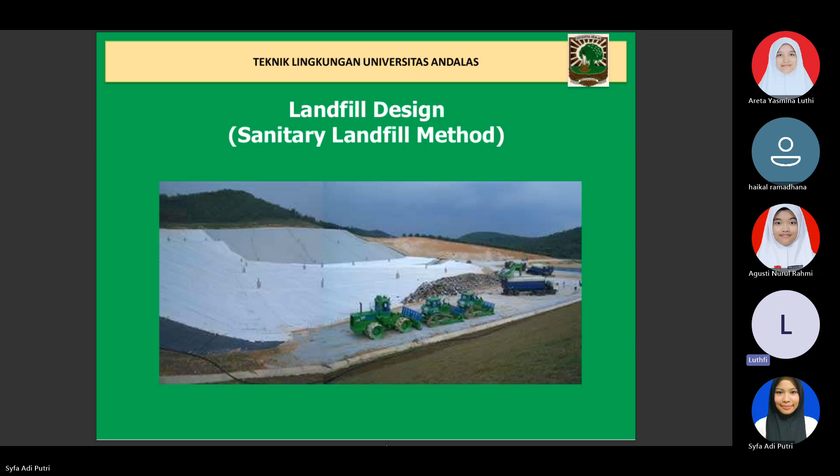Next, about landfill site requirements, in accordance with Indonesian National Standard 03-3241-1994 on procedures for selecting landfill sites. Landfills are equipped with infrastructure and facilities consisting of drainage infrastructure, roads, reception facility, waterproof layer, gas containment facility, leachate containment facility, cover material, heavy equipment, greening, and supporting facilities.

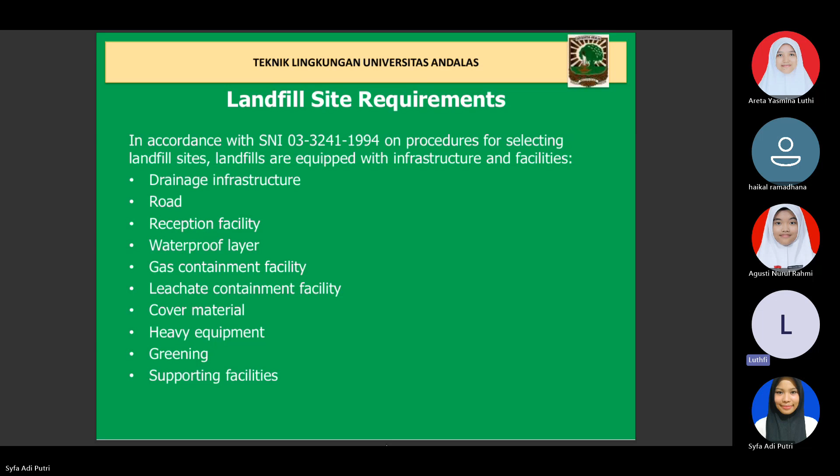The next slide shows pictures of the sanitary landfill.

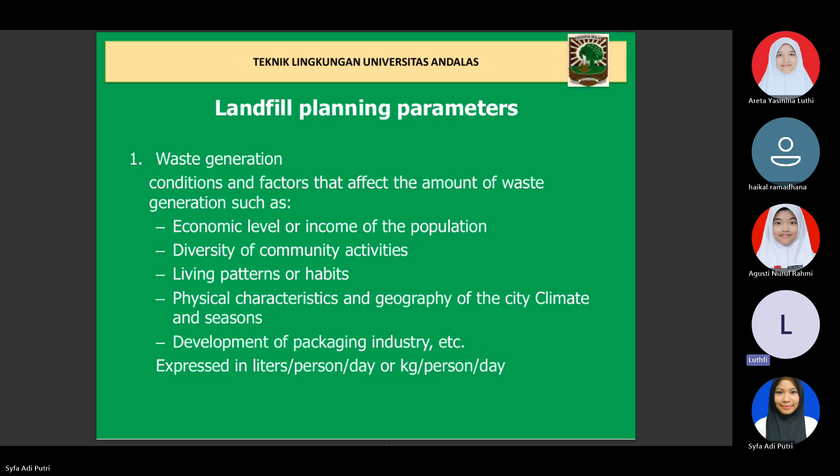The landfill planning parameters: the first is waste generation. The conditions and factors that affect the amount of waste generation include the economic level or income of the population, the diversity of community activities, living patterns or habits, physical characteristics and geography of the city, climate and seasons, and the development of the packaging industry, among others. Waste generation is expressed in liters per person per day or kilogram per person per day.

The second parameter is land area requirement. The amount of land required will depend on the amount of waste to be disposed of. The larger the waste generated by a city, the wider the landfill needed to accommodate it. In general, the determination of landfill needs is based on the waste generation reduced by certain factors.

Initial density: the collected waste is transported to the landfill. At the landfill, the compaction process occurs, and comparing the density of waste in the landfill with the initial condition, the amount of landfill land needed is then estimated.

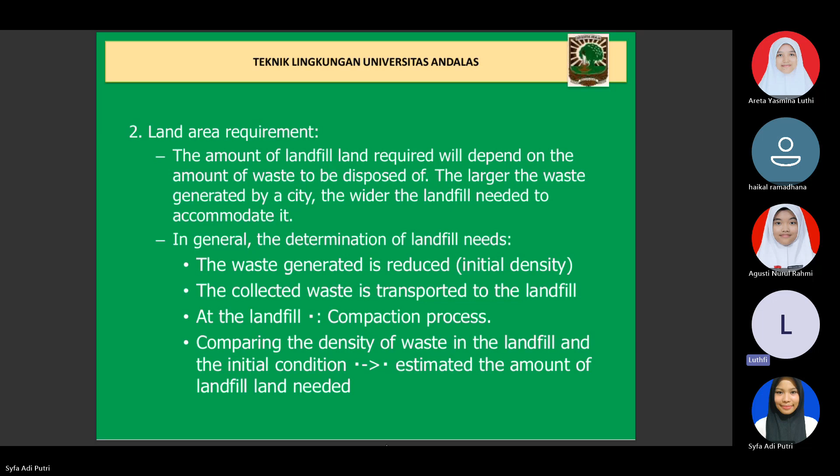Next is land area requirement and landfill capacity. The site used for the landfill should be able to accommodate waste disposal for a minimum of 5 years of operation. The initial calculation of landfill land requirement per year is as follows.

This formula: the volume of waste to be disposed of, times the waste compaction level, times 365, divided by the height of the embankment plan in meters. Then the land area requirement can be found with this formula: land area per year times the land age in years, times the ratio of total land area to effective land area, which is usually 1.2.

Next is an example. We have to determine the landfill land requirement area for 5 years, given that the incoming waste every day is 800 cubic meters, with a planned pile height of 10 meters and a compaction factor of 0.33. How to solve it is shown in the next slides.

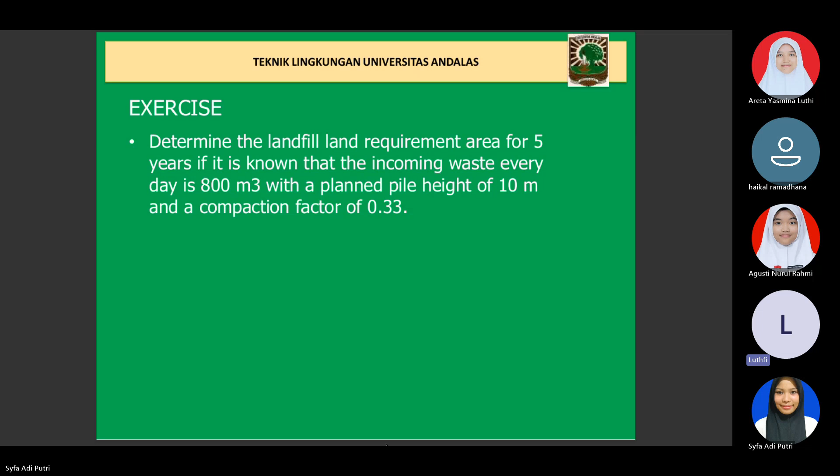Next is landfill site planning. Things to note: first, spatial suitability, to avoid overlapping land uses. Second is the utilization plan — the utilization plan of the former landfill needs to be determined from the beginning. Some alternative utilizations of the former landfill include greening, plantation land, parks or recreation areas, sport sites, and so on.

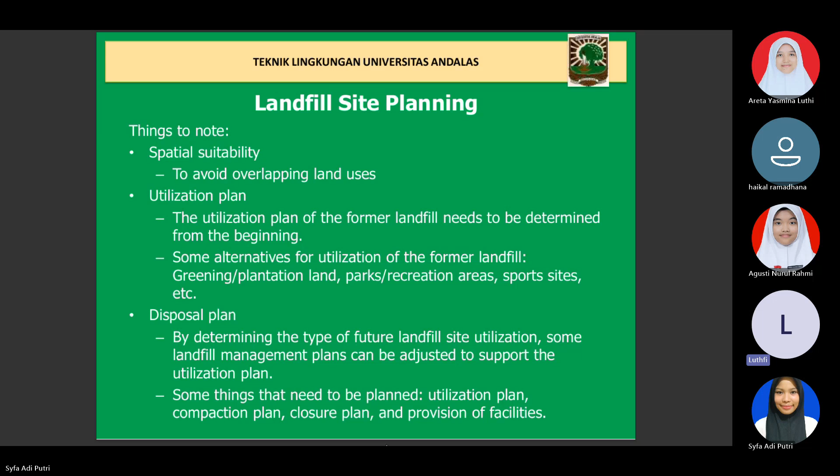Next, the disposal method should meet these principles. First, in large cities and metropolises, the sanitary landfill method is planned, while medium and small cities must at least plan for the controlled landfill method.

There must be control of leachate, which is formed from the decomposition process of waste, so as not to pollute the soil, groundwater, and existing water bodies. There must also be control of gases and odors from waste decomposition, so as not to pollute the air, cause fire or smoke hazards, or cause greenhouse effects. There must be control of disease vectors.

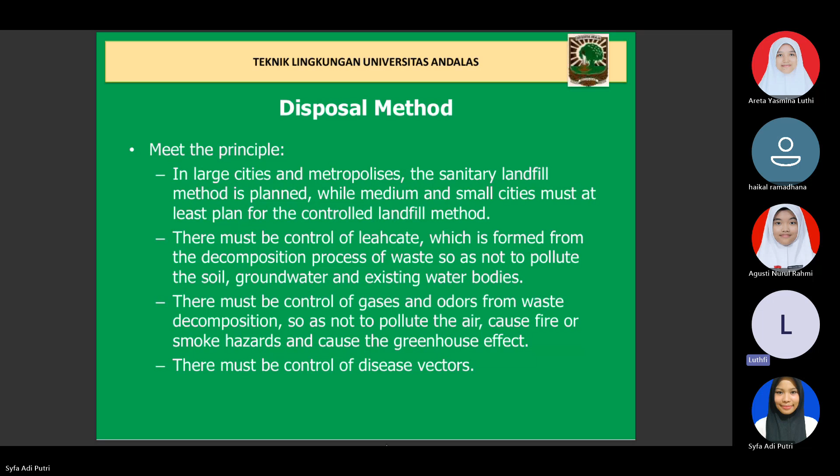Next, the landfill infrastructure and facilities planning. Public facilities consist of access roads, operation roads, support buildings, drainage, fences, and signage. Environmental protection facilities consist of landfill base formation, leachate collection channels, gas vents, ground cover, buffer zone, and test wells.

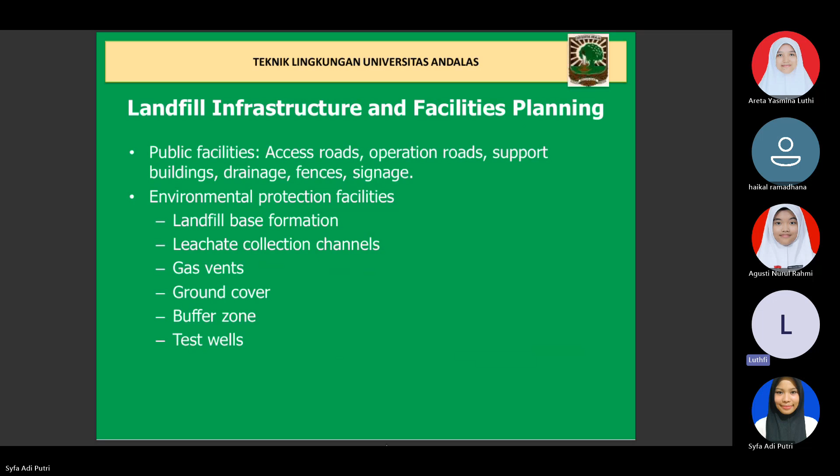For the next part, supporting facilities consist of weight bridge, clean water, hangar, firefighting facilities, and recycling and composting facilities. For operational facilities, the heavy equipment required includes bulldozers, wheel or truck loaders, excavators, or backhoes.

And for the next is the layout plan. In determining the layout plan for the sanitary landfill, we must consider the land use should be optimized so that no land is left unused, and the landfill site should be protected from public roads that pass through it.

This can be done by placing a living fence around the landfill, which can also function as a buffer zone. The leachate treatment ponds should be located so that leachate flows by gravity as much as possible. The placement of operational roads must be adjusted to the landfill cells or blocks so that all waste piles can be easily accessed by trucks and large equipment.

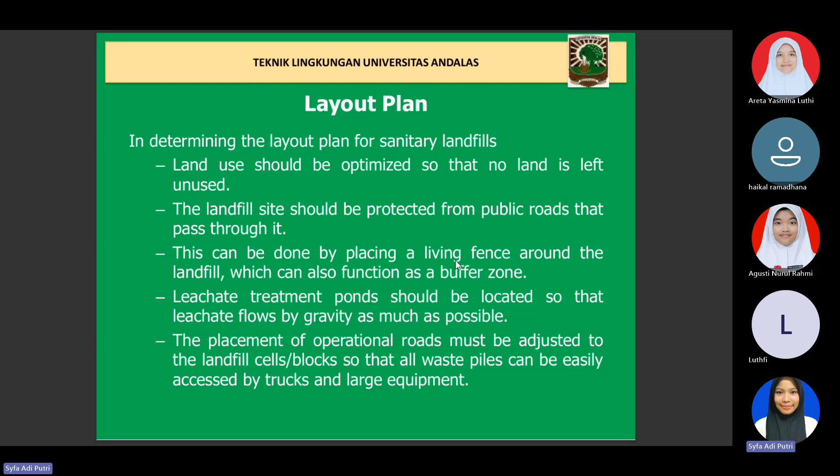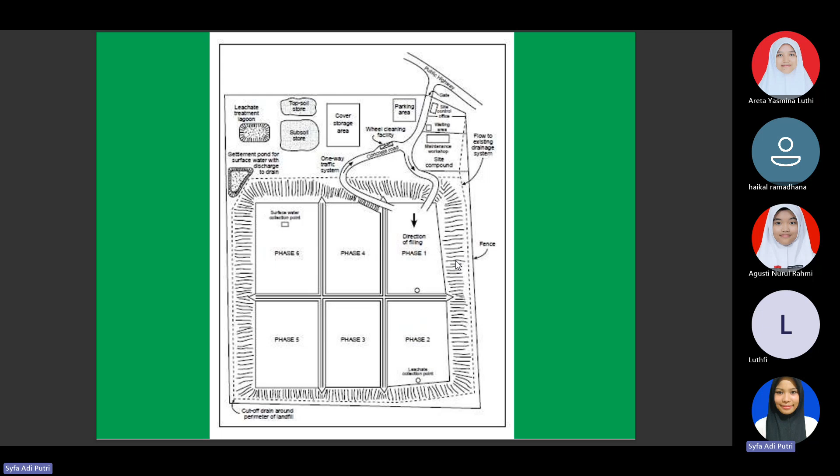This is an example of the layout plan for the sanitary landfill, and this is also the layout design for a landfill. And what is the stage of landfill design?

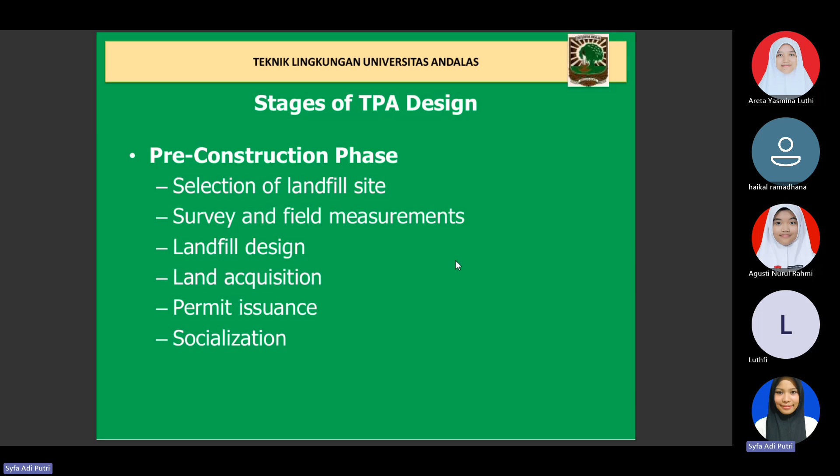First is the pre-construction phase, which consists of selection of landfill site and survey and field measurement, and then landfill design, land acquisition, and permit issuance, and then socialization.

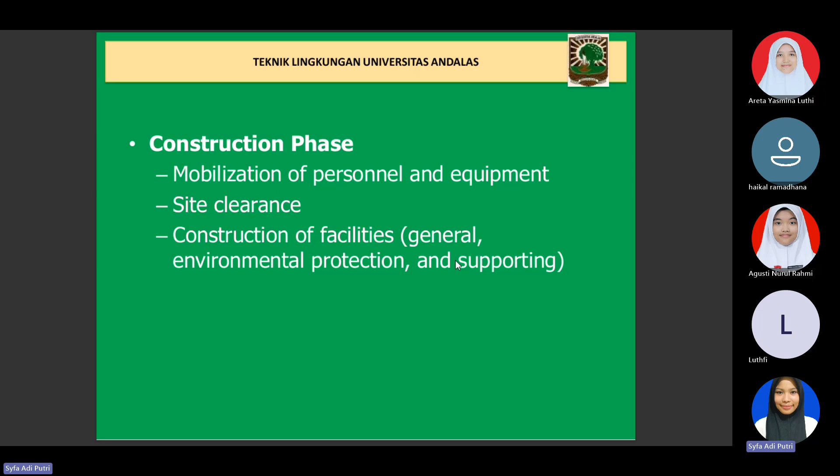For the construction phase, including the mobilization of personnel and equipment, site clearance, construction of facilities for general environmental protection and for supporting facilities.

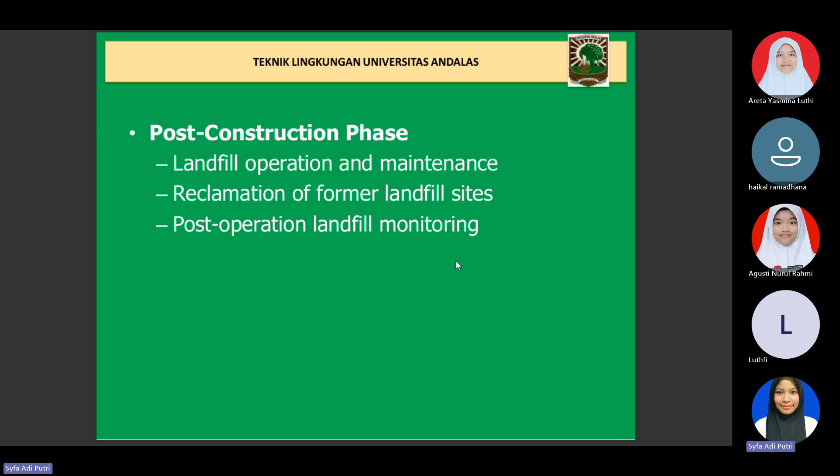And for the post-construction phase, consists of landfill operation and maintenance, reclamation of former landfill site, and post-operation landfill monitoring.

And then the environmental assessment document in accordance with applicable laws and regulation. In Indonesia, we have Government Regulation number 22 of 2021 and Minister of Environment and Forestry Decree number 4 of 2021. And then we have Environmental Impact Assessment, or AMDAL, for landfills more than 500 tons per day, or landfills located in tidal areas for all sizes.

And also we have the UKL-UPL, or the environmental management efforts and environmental monitoring efforts, for landfills less than 500 tons per day. And for the general provisions for landfill design, the selection of urban landfill sites must comply with existing regulation.

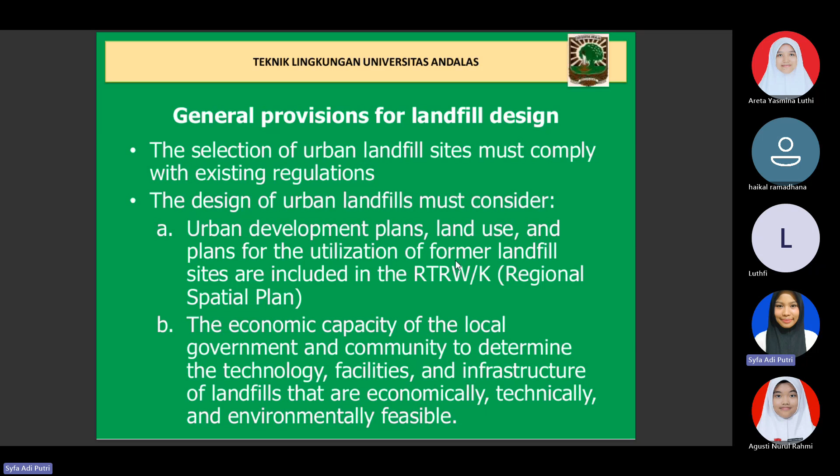The design of urban landfills must consider first the urban development plans, land use, and plans for the utilization of former landfill sites, which are included in the RTRW, or the Regional Spatial Plan. And then the economic capacity of the local government and community to determine the technology, facilities, and infrastructure of landfills that are economically, technically, and environmentally feasible.

Next is physical and geological conditions such as topography, soil type, soil permeability, groundwater depth, surrounding water condition, tidal influence, wind, climate, and rainfall, to determine the final waste disposal method.

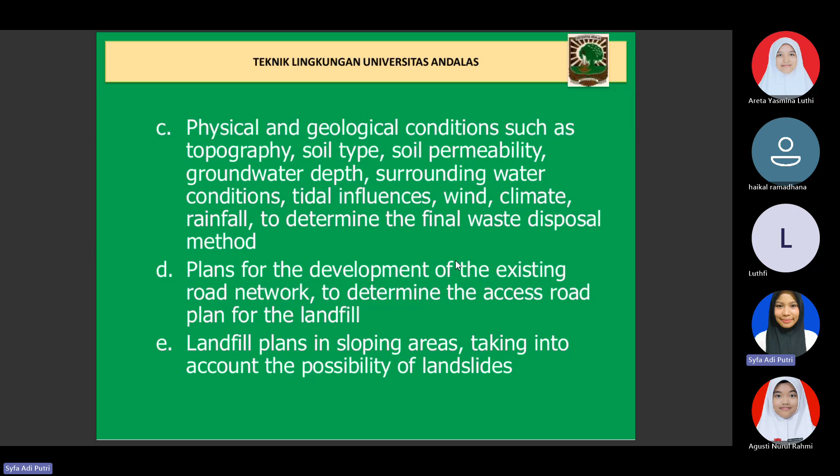And then plans for the development of the existing road network to determine the access road for the landfill. And the last is landfill placement in sloping areas, taking into account the possibility of landslide.

And for operating and maintenance costs for landfill are available, and also the waste disposed of at the landfill must have undergone volume reduction using the 3R program and composting at source.

And then waste disposed of at the landfill site is limited to municipal waste that does not originate from industry or hazardous waste or hospitals, for example infectious waste.

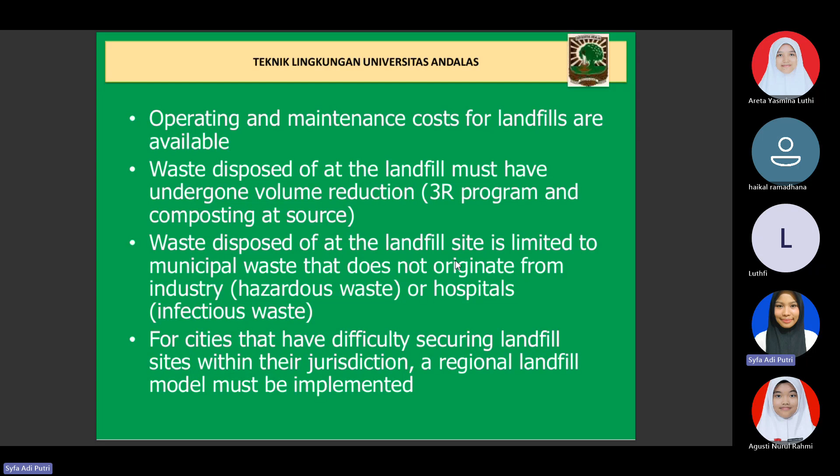And for cities that have difficulty securing landfill sites within their jurisdiction, a regional landfill model must be implemented.

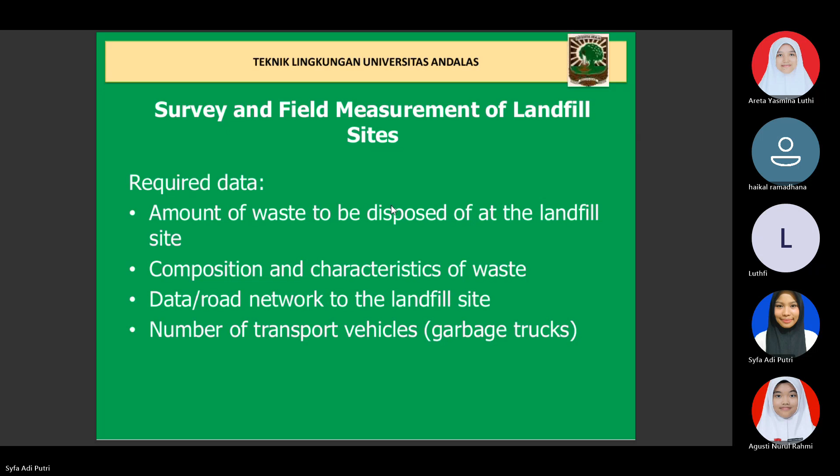Surface water condition like distance from the landfill, water level and its fluctuation in dry and rainy season. River water quality like COD, BOD, heavy metal, chloride, pesticide, and sulfate. Next is leachate quality, including COD, BOD, heavy metal, chloride, and organics.

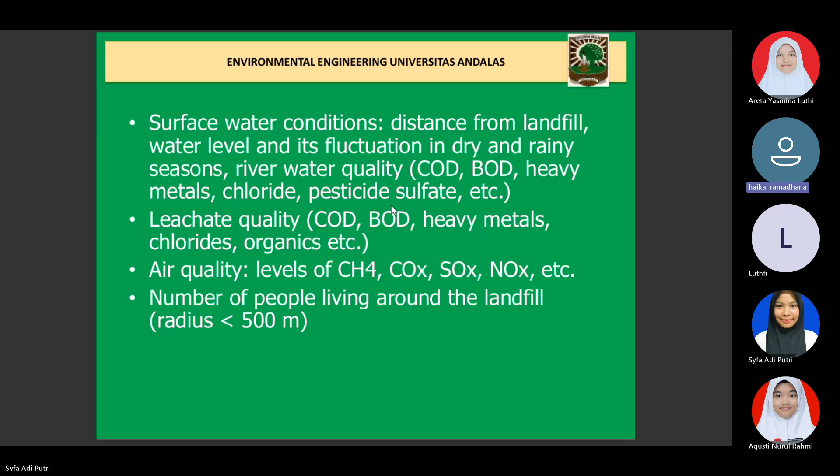Next is the air quality, like level of CH4, COx, SOx, NOx, and etc. And the last one is number of people living around the landfill, within a radius of less than 500 meters.

Okay, this slide tells about Detailed Engineering Design, or DED, in the landfill.

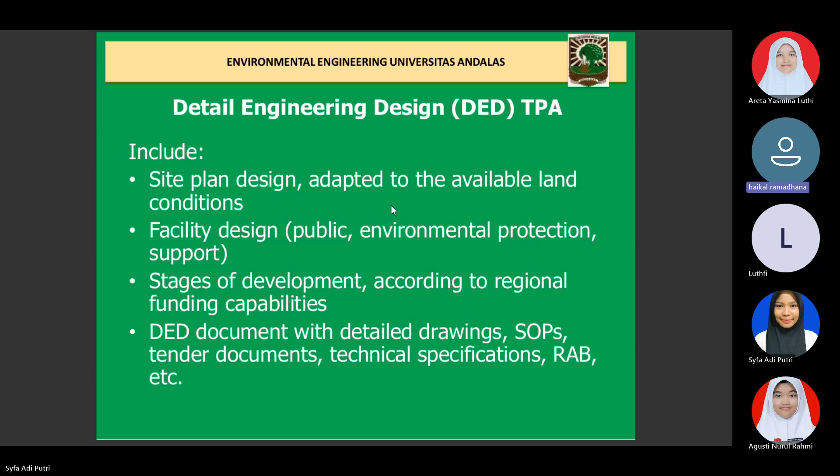This includes the site plan design adapted to the available land condition, facility design like public, environmental protection, and support facilities, stage of development according to regional funding capabilities, and the last one is the DED document with detailed drawing, SOPs, tender document, technical specification, RAB, and etc.

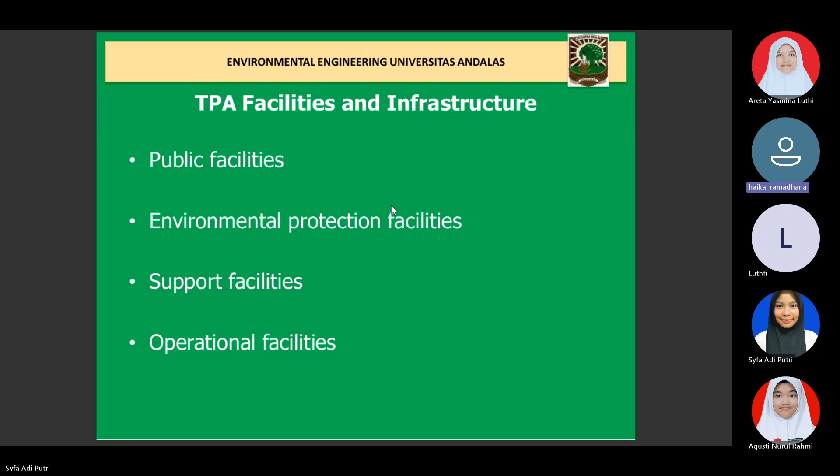This slide tells about the landfill facilities and infrastructure. First is public facilities, including public facilities, environmental protection facilities, support facilities, and also operational facilities.

Next is the public facilities, including the driveway, office, guardhouse, workshop, garage, drainage channel, waste processing facilities like recycling, composting, incineration, fencing, and signage.

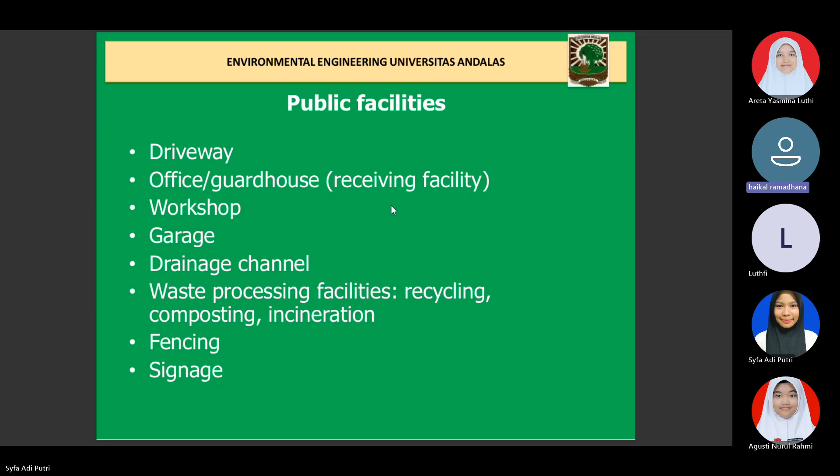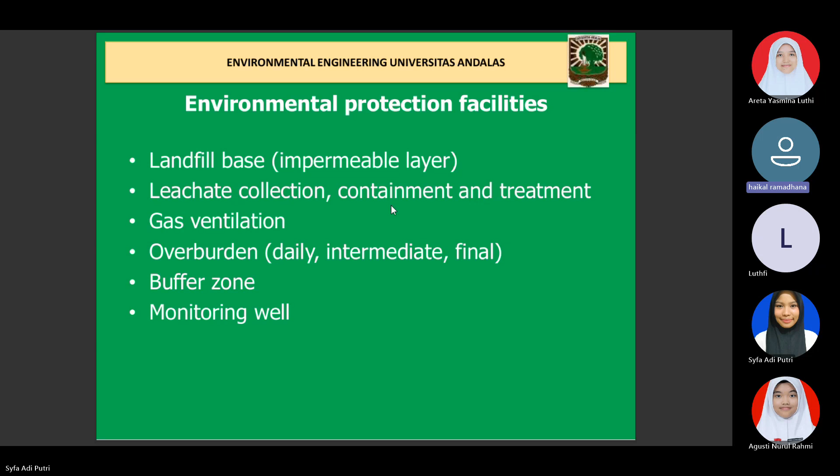Next is environmental protection facilities, including landfill base impermeable layer, leachate collection with containment and treatment, gas ventilation for CH4, overburden for daily, intermediate, and final cover, buffer zone to reduce the impact of the landfill, and the last one is monitoring well.

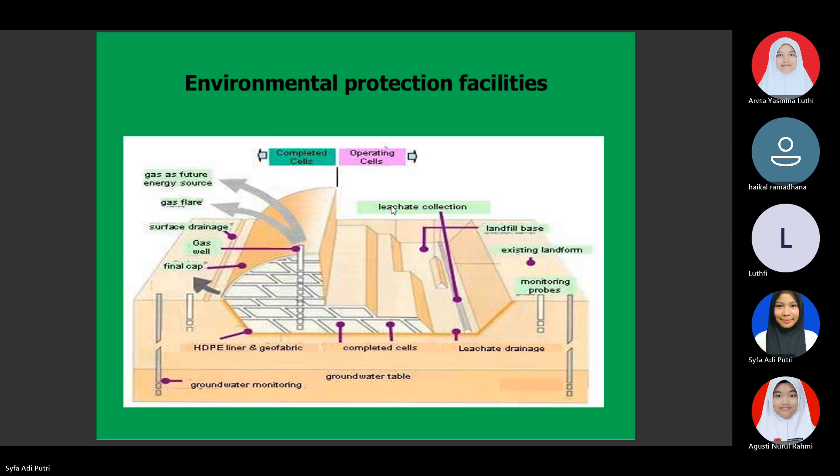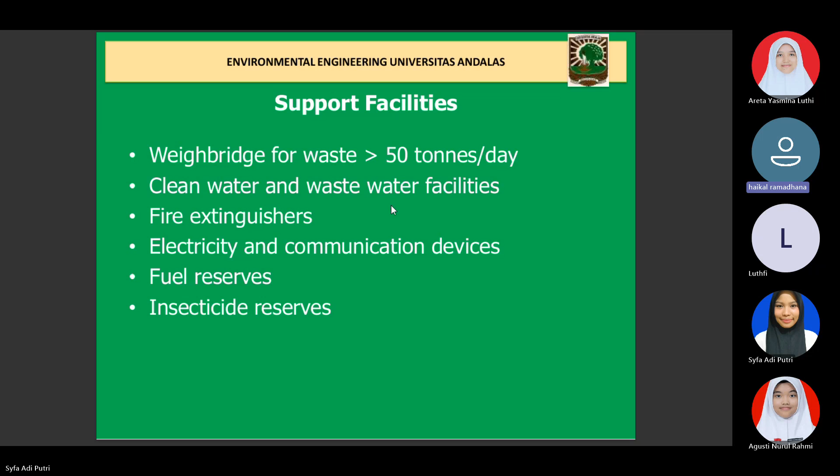The next, please. The last one is support facilities, including the weighbridge for waste more than 50 tons per day, clean water and wastewater facilities, fire extinguishers, electricity and communication device, fuel reserves, and insecticide reserve.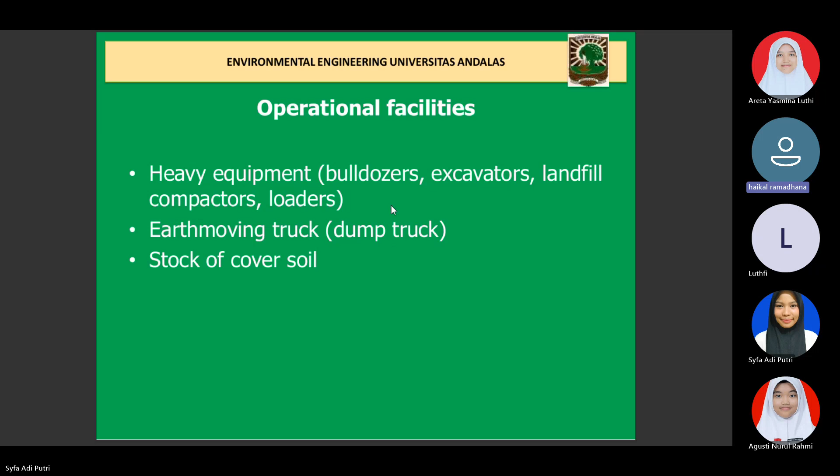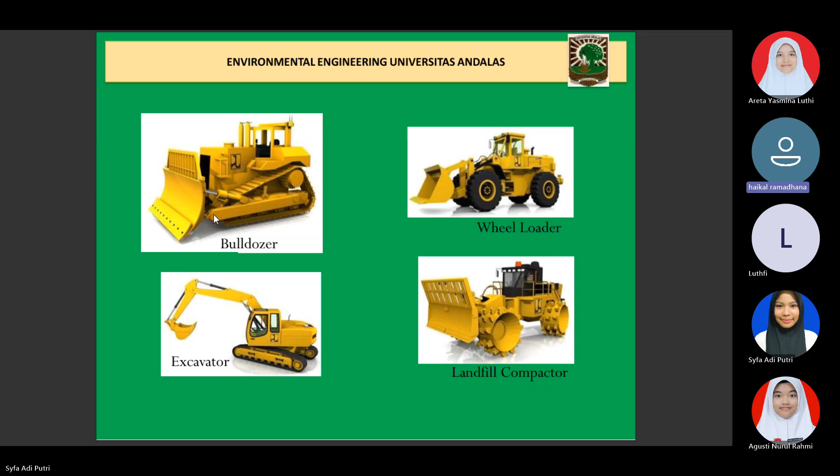Next slide, please. Okay, here are some pictures of the heavy equipment that is used. First there is a bulldozer. Next is a wheel loader, excavator, and landfill compactor.

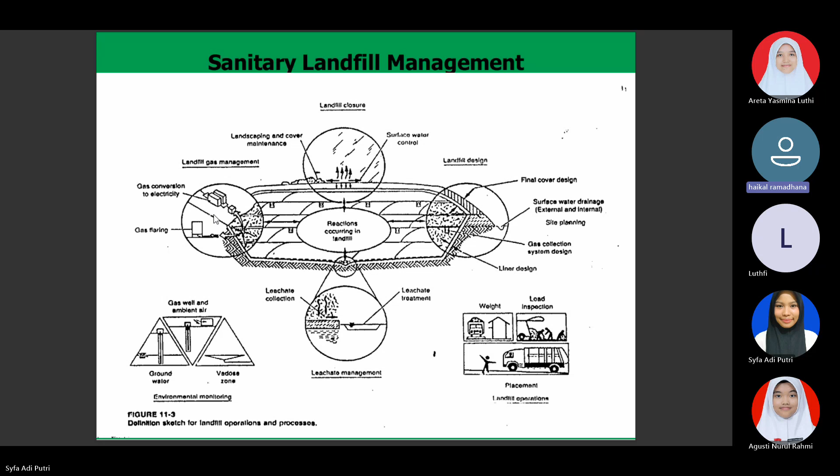The landfill must have pipes for CH4 and also for leachate. Next slide, please.

Okay, that's all from me. I yield back to the moderator.

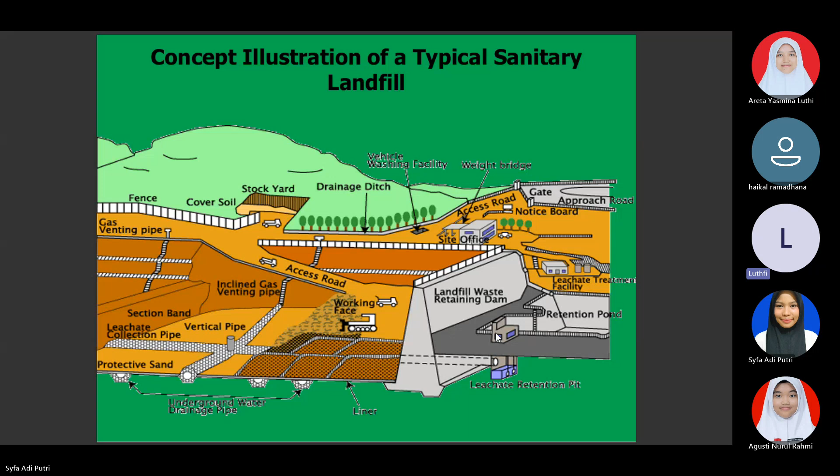Very well, I'm going to answer Areta's second question. First, I want to request Syfa to help me share the screen again, the slide. Slide number 9, please. Thank you.

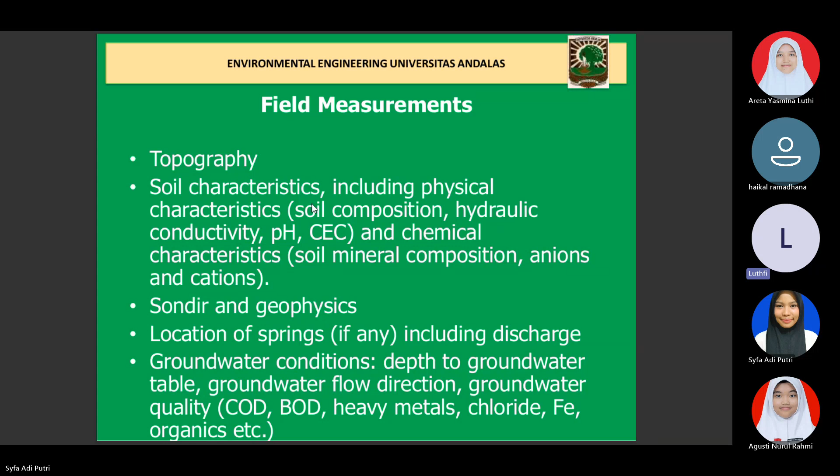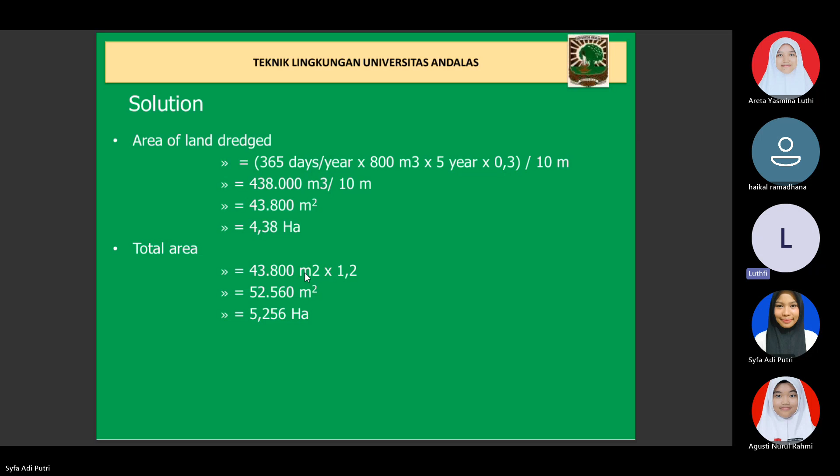Areta is asking where the 1.2 comes from in the total area calculations. It is shown at slide 7, in the formula. The land area requirement - the 1.2 is the ratio of total land area to effective land area, and that ratio is 1.2. So that's where 1.2 comes from.

Is it all good, Areta, or do you have any follow-up questions? That's enough for me. Thank you.

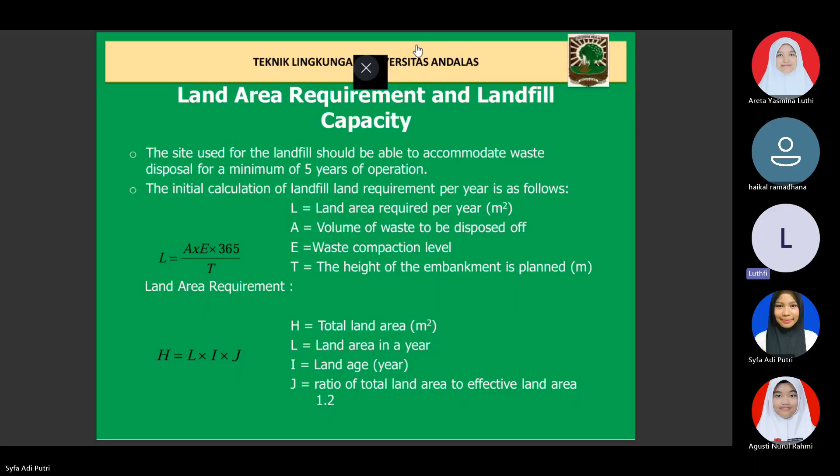Next we will move to Rahmi's question. She's asking how a monitoring system can be integrated into landfill design to provide early warning and response during disaster conditions. This question will be answered by Syfa. To Syfa, time is yours.

For the question on how a monitoring system can be integrated into landfill design for early warning during disaster conditions: imagine we are designing a landfill and want to make it super safe and prepared for anything that could go wrong, like a disaster. We can do this by integrating a smart monitoring system into the design.

This involves using sensors to keep tabs on things like leachate level, gas emissions, and the stability of the landfill structure. The data from these sensors is fed into a central system that uses models to evaluate the risks and forecast any potential issues, like the diffusion of contaminants into the surrounding environment.

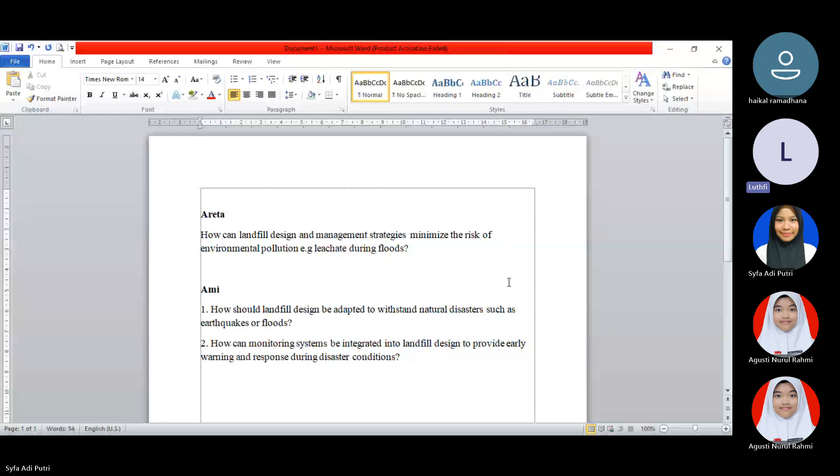In flood-prone regions, the landfill should be elevated above the expected flood levels and include robust stormwater management systems like diversion channels and reinforced berms. The landfill cover system should also be strengthened to prevent erosion and water infiltration during heavy rains or flooding events. I think that's all.

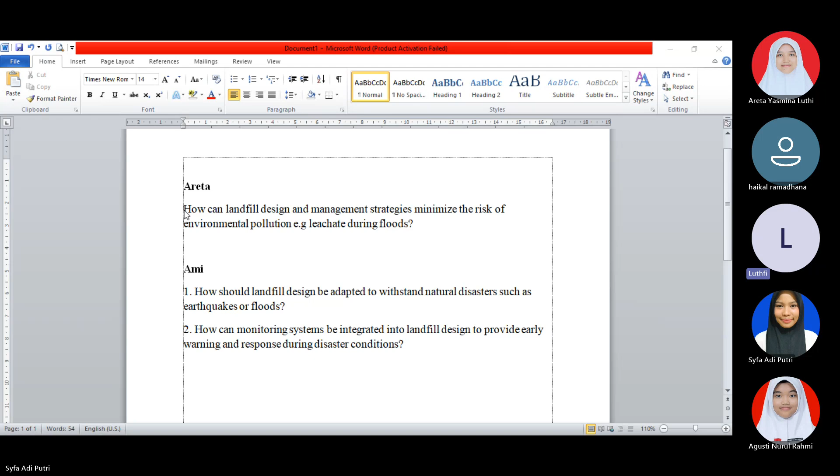So, Ami, do you have any follow-up question regarding my answer? That's all good for me. Thank you for the group one. All right, thank you so much.

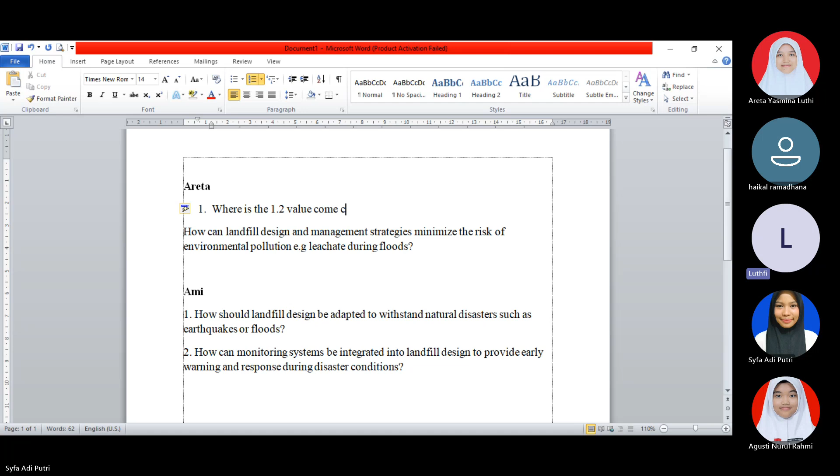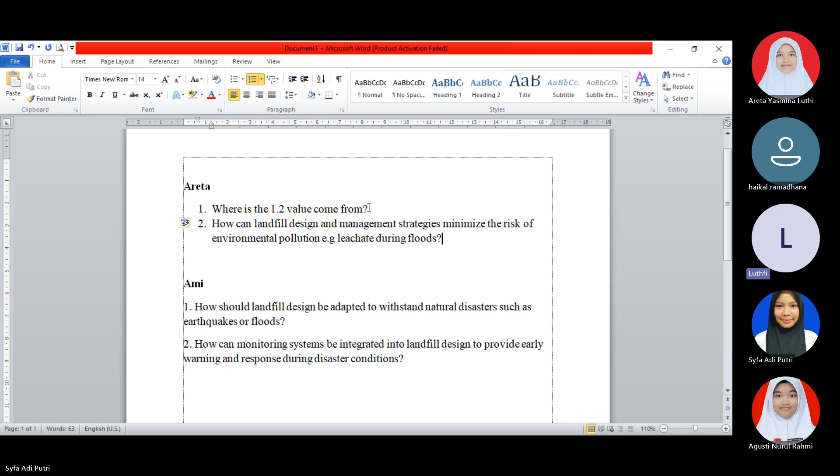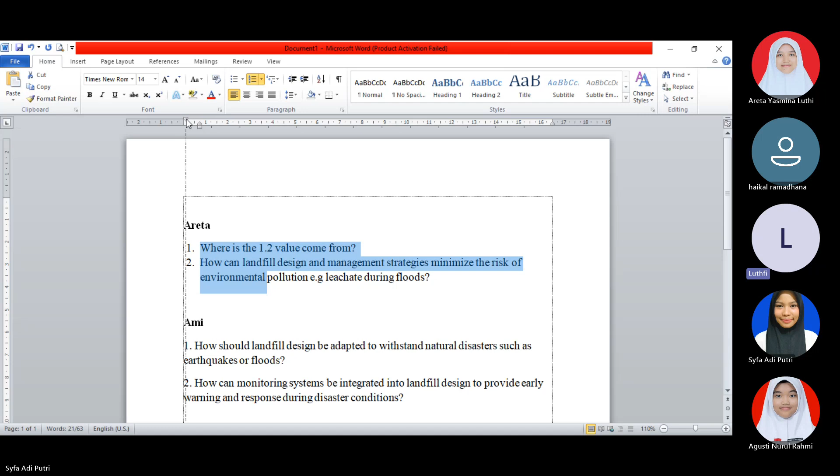Now we will go back to the first Areta question that was answered by Haikal. Areta has a follow-up question about how vulnerable the leachate drainage system in sanitary landfills is to backflow or overflow during flooding events, and it will be answered by Haikal again. To Haikal, time is yours.

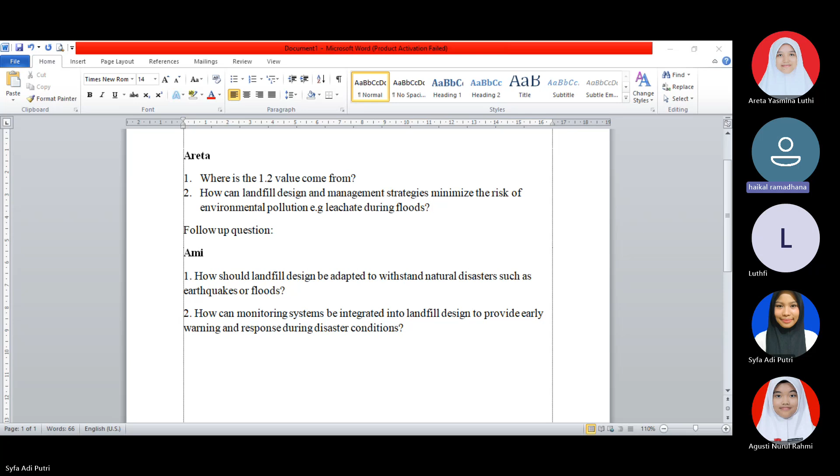I would like to answer the follow-up question from Areta. The leachate drainage system in sanitary landfills is vulnerable to backflow or overflow during flooding due to hydraulic overload, stormwater infiltration, blocked or damaged pipes, and power failure affecting the plant. This condition can lead to extensive leachate accumulation and potential liner failure, increasing the risk of environmental contamination. All right, back to the moderator.

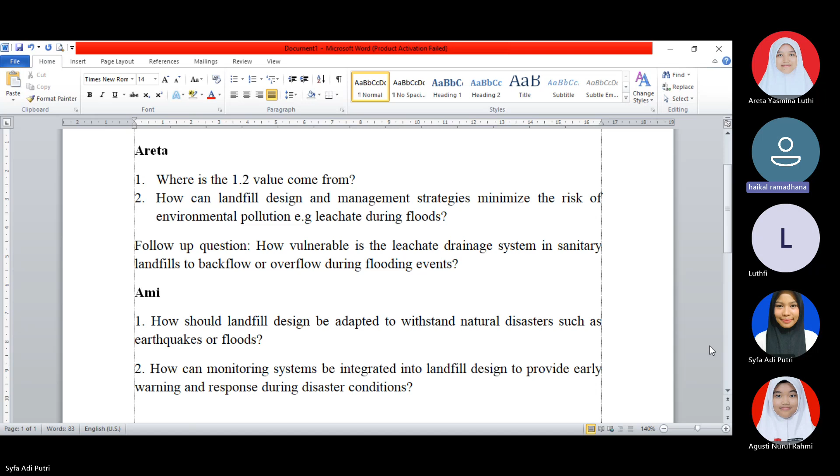Is that clear, Areta? Okay, thank you, Haikal.